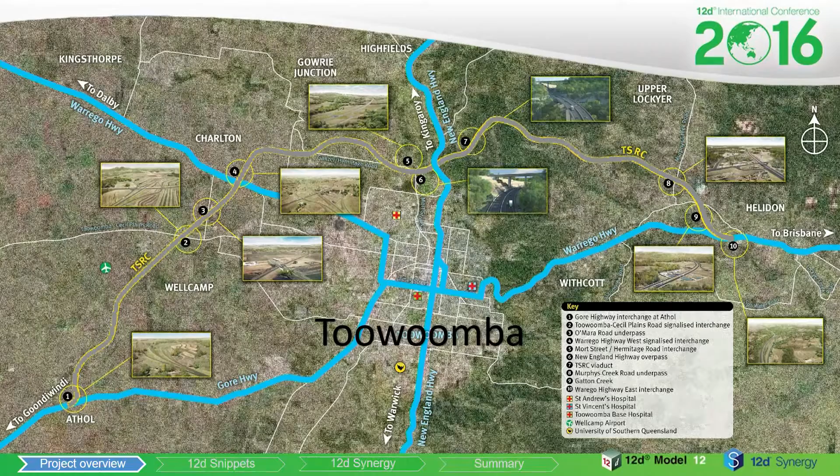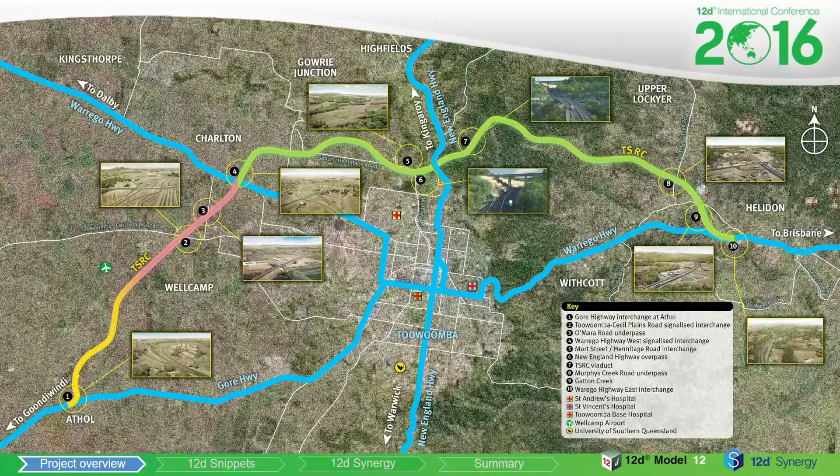So a little bit about the project. The bypass road is situated to the north of Toowoomba. It's about 41 kilometres in length and starts at the Warrego Highway in the east, travels through to the Gore Highway in the west via Charlton. There's 4 lanes from the Warrego Highway east interchange through to the Warrego Highway west interchange, and then a further 2 lanes connecting through the Gore Highway.

So there's multiple grade separated interchanges along the road. There's the Warrego Highway east. This is the start of the project. There's a system interchange that allows traffic to continue onto Toowoomba or connect to the 41 kilometre toll road. About halfway along the road, we come to our first interchange at Mort Street. It's a simple diamond interchange with dual roundabouts effectively, and allows connection to the New England Highway and to Toowoomba CBD.

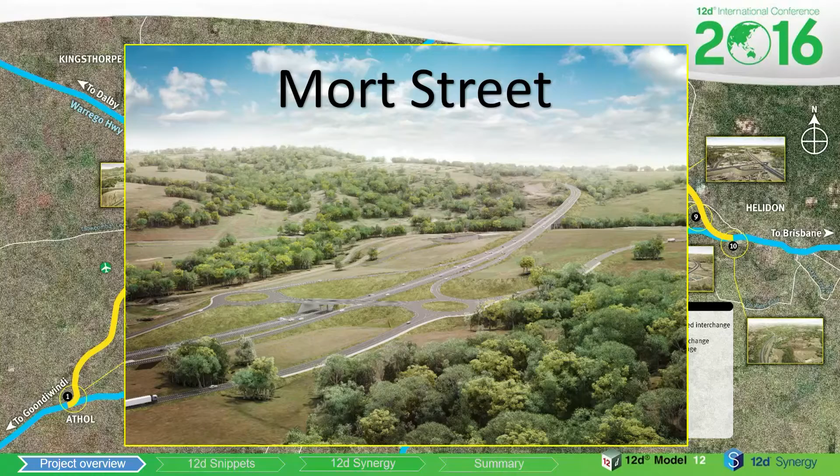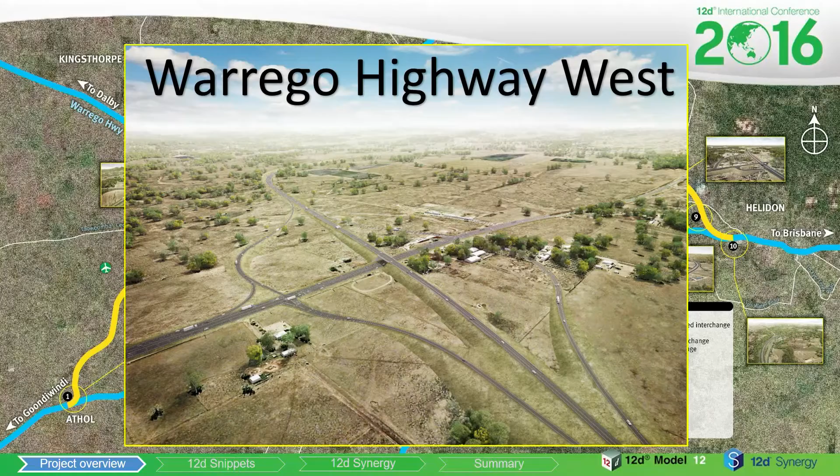We come along Warrego Highway West, again another diamond interchange, and this is at the end of the 4-lane section and provides the vital connection through the existing national land transport network. So a lot of freight will be going out through the existing Warrego Highway and bypassing the city. We have Toowoomba Cecil Plains Road. This is on the 2-lane section of the road. Again another diamond interchange, and provides connection to the Wellcamp Airport and Business Park.

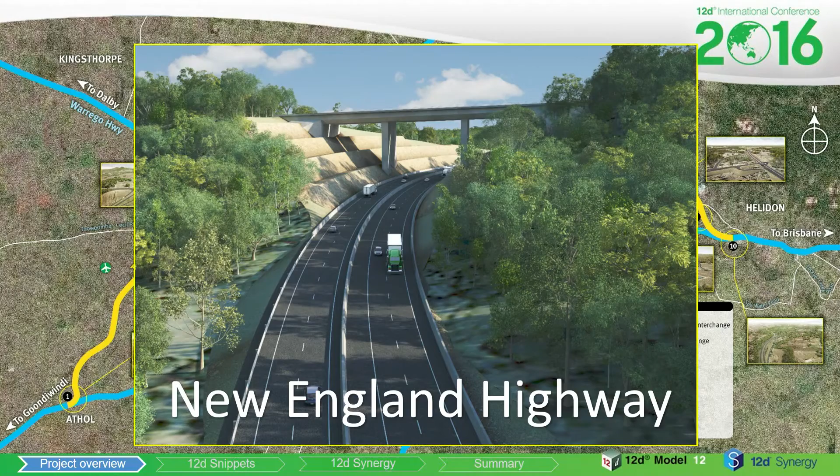Gore Highway is the end of the project and provides a simple interchange connection at Athol and completes the expansion to the National Land Transport Network. So on the project, there's approximately a 30-metre deep cutting through the top of the range. This will allow all heavy vehicles, including dangerous goods carriers and over-dimensioned vehicles, to use the Toowoomba Second Range Crossing without going through the CBD. The New England Highway will be relocated to a new structure that connects over this cutting. On the approach to this cutting, there's an 800-metre viaduct in fairly challenging conditions, so it's fairly impressive as you head up the range.

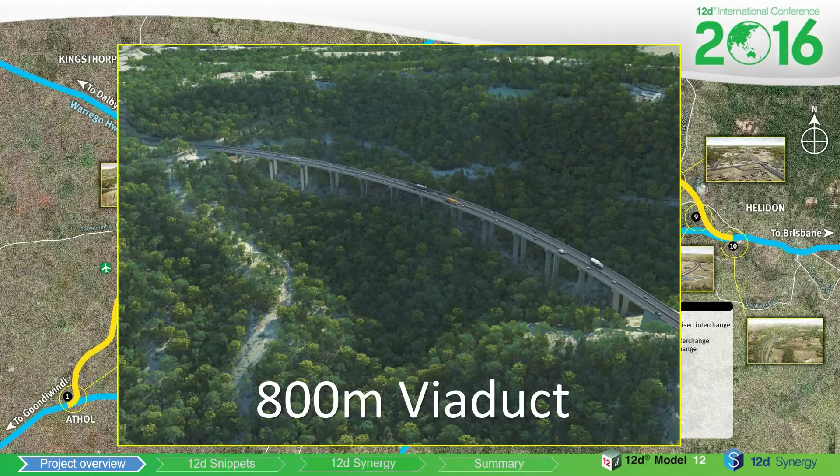12d version 11 was used to design the roads, earthworks, drainage, public utility plant and all other miscellaneous civil works across the project. To manage these disciplines, the project was effectively split into 4 key areas. So we had an east, a central, a west and local roads. So that was all our returned works to the local councils and the TMR.

During the tender, 12d version 10 and decisional templates were used to design the road. However, with the release of version 11, the old decisional templates were retired for snippets. So the snippets allowed us to insert decisional-like strings to create the benching, but with the full flexibility of being able to change the grade, width, slope individually. Being a very large earthworks project, this was extremely important to allow individual modification without the need to develop a new decisional template each time.

So for the designers, it's a two-step process to insert the benching on the project. First of all, we insert the first snippet, and this prompts the user for a variety of parameters, if you like, to define the geometry. So here we have whether it has a table drain or not, and all the cut and fill slope widths, slopes, etc.

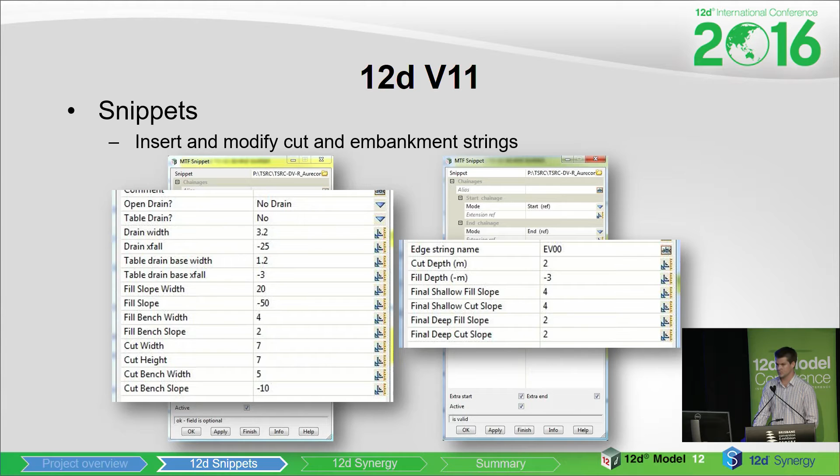Now this can be applied for the whole alignment, or it can actually just be applied for a particular cutting. From here, the user will then modify that benching because it's actually an overbuild. It builds past the existing terrain. And the second part of the snippet is the actual trim. So we then trim the benching back to the natural terrain using a couple of minor parameters of cut depth, fill depth, and when to invoke shallow and deep decisionals effectively. So there are still decisionals in them, they're just a little bit smarter with snippets.

This typical section's by far not the largest on the project, but shows how extreme some of the earthworks are. And this goes for both cuts and embankments on the project. We had challenging conditions on both sides of the Great Dividing Range. We had the very steep terrain on the eastern side, and then it's very flat with some not so great black soil to work with on the western side. So having the ability to modify each individual bench as required for better stability, when we hit not so great soil, we're able to lay them back and then steepen them back up without a problem.

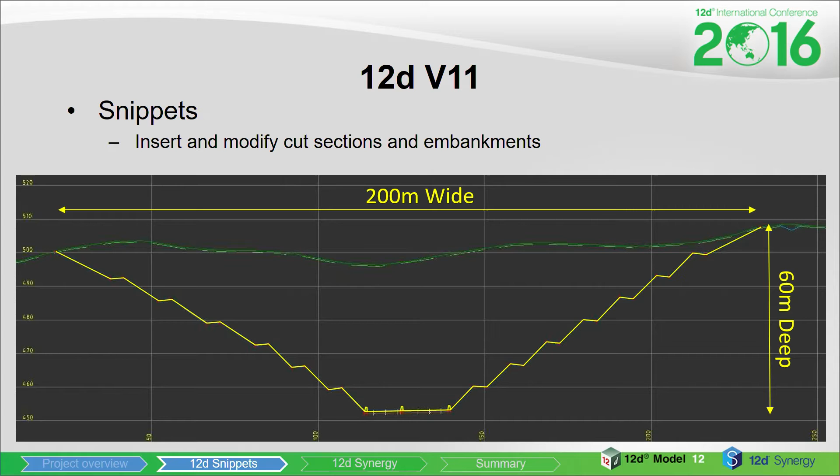We had a few other snippets on the project. So we had a concrete barrier snippet. This effectively prompted the user for the barrier type, whether it had lighting or didn't have lighting. Now this varied just the top width of the barrier. It had a variety of string selections, backstop, behind the barrier, and any verge transitions that were required.

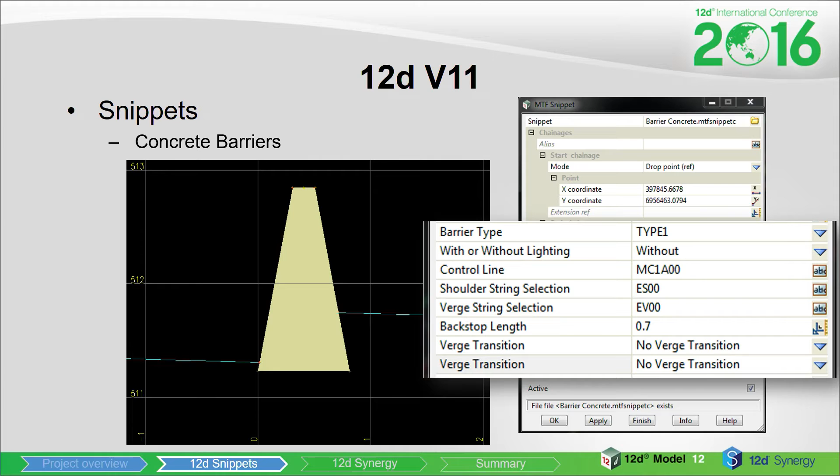So the concrete barrier shown here is not that snippet. This one's a little bit more complicated because it actually takes into account the varying slope of the carriageway, or the difference in slope, and varies the slope of the concrete barrier. Now, it again is a two-step process, but a little bit more complicated than the standard insert.

We had guardrails for pretty much the entire length of the project, and to get these to be inserted readily was a must. So we again built a small snippet that gave the option for the user to define whether it was thrie-beam or W-beam. It gave the option to define the terminal type, so type 1, type 2, whether we had connection to a concrete barrier. There's a variety of drop-down lists to choose from. Again, it prompted for the control line, string selection, a few parameters, and then the snippet instance.

So this is a pretty important feature of the instance. It allows us to actually overlap the guardrail as shown here in the picture, because without that, it wants to do all sorts of crazy things. Both the concrete barrier and the guardrail snippet were actually inserted on different layers, and that just allows us a bit more flexibility with the formation of the road without having to worry about the guardrail snippet, and allows us then to manipulate the road and let the snippet do a little bit more manipulation where required, so modify the verge behind it if required.

So you can see there's a verge width of 1.2. If the verge was only a metre, it would actually push it out to 1.2 for us where we inserted it.

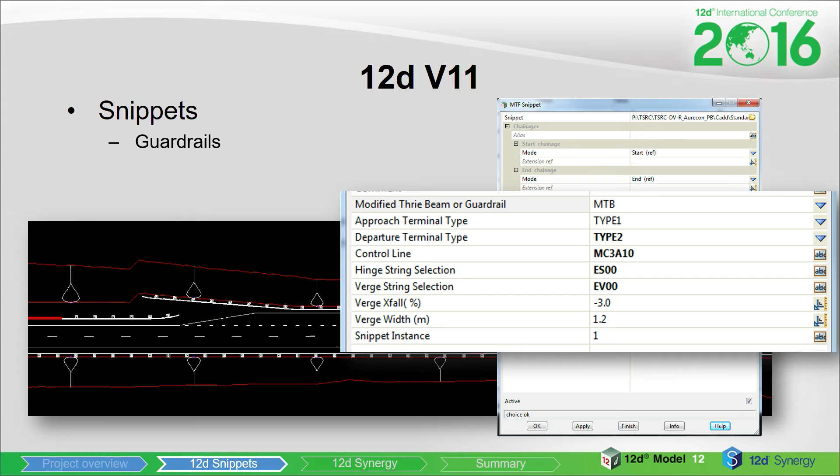Another snippet we had on the project was the emergency stopping bay you can see here. Again, there's a number of string selections, and we had the string selections in all our snippets, effectively because as we went down the different control lines, we did actually have unique string names based on the actual control line numbering. So if it was on a 0-0 control line, it obviously started at 0-0, 01, 02. And if it was off the 10 alignment, it would go 10, 11, 12. So we had a unique naming system that allowed us to actually identify strings depending on where they were.

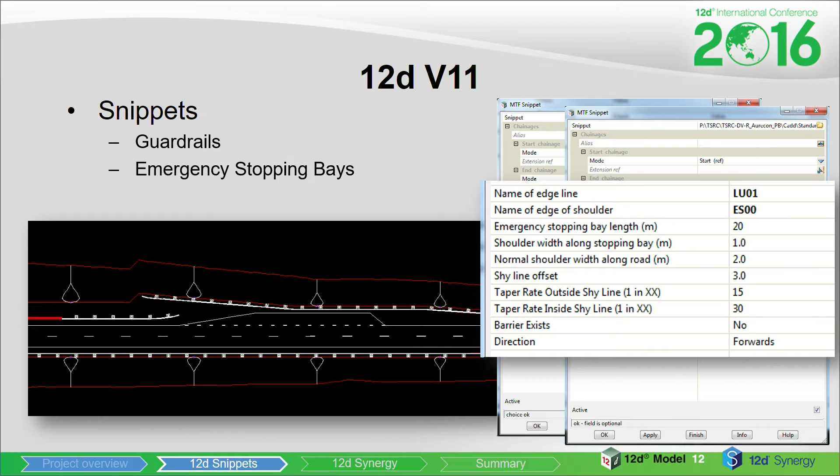This snippet again prompts you for the length of the bay. Again, string selection, string shoulder widths. It also had an important value inserted for the shyline offset. This is particularly important where we have guardrail and concrete barriers. It allows us to actually taper the rate inside and outside the shyline differently. So if it was inside, we'd go 1 in 30. If we were outside, we'd steepen up to 1 in 15. It just shortened the barrier. Again, all these snippets are available to be applied forwards and backwards on the control line.

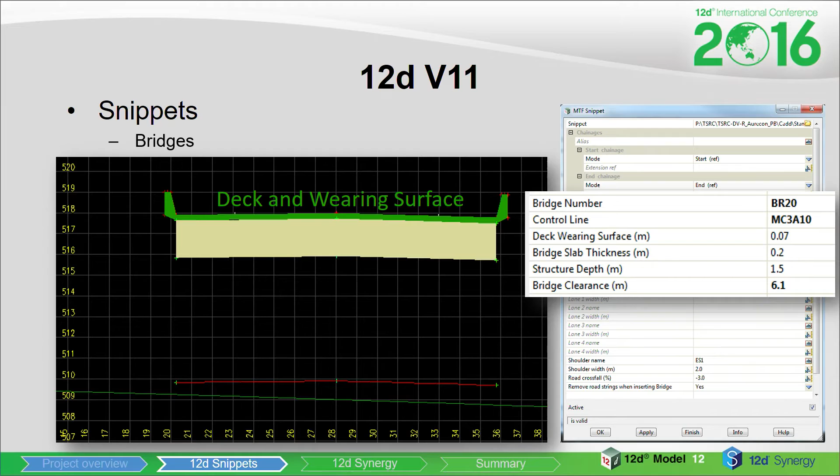We had a snippet that inserted our structures across the project. It's nothing fancy, it's quite a simple snippet. It prompts the user for a bridge number and control line. It gave us the ability to have a varying deck wearing surface and slab thickness, even though most of those were fairly constant, but also gave us a structure depth.

Now this allowed us to actually have soffit strings, and from the soffit strings we were able to put a bridge clearance and actually check our roads to this bridge clearance. So pretty easy to set up, very, very important for the road designers, and quick to see where you have your clearance.

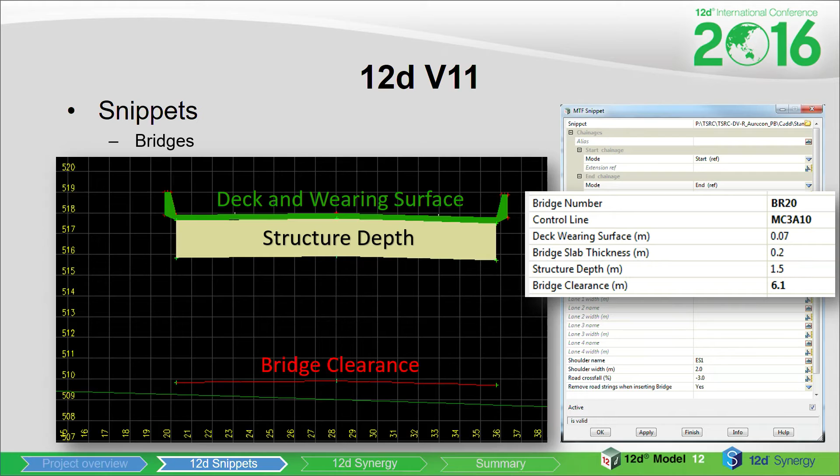So a few other snippets. We had an entry ramp snippet. Now, again, similar to what Steve talked about yesterday, it passes a few parameters through. So this particular one passes your design speed and your travel time. Now that's great if you wanted to calculate the exact length to 4.5 seconds of travel time if you want a particular length, but we also have the ability to manually override that lane length, which became important down the track as we wanted to extend our lanes. Again, applied forwards and backwards and a variety of string selection to allow us to actually insert it.

The exit ramp snippet is exactly the same as the entry ramp snippet in that it actually calculates the length required based on the speed and the lane width. This gave us the ability to actually modify it as needed, but again, we found sometimes if there was a sight distance requirement, it was very hard to muck around with the design speed when you wanted to lengthen it, so we overrode a manual auxiliary lane length where required.

So both snippets utilise the start and or end of the control line. So as the interchange moved or lengthened, the entry ramps actually got longer or shorter as required as well. And both snippets gave us the ability to add additional line marking or shoulder run out where required.

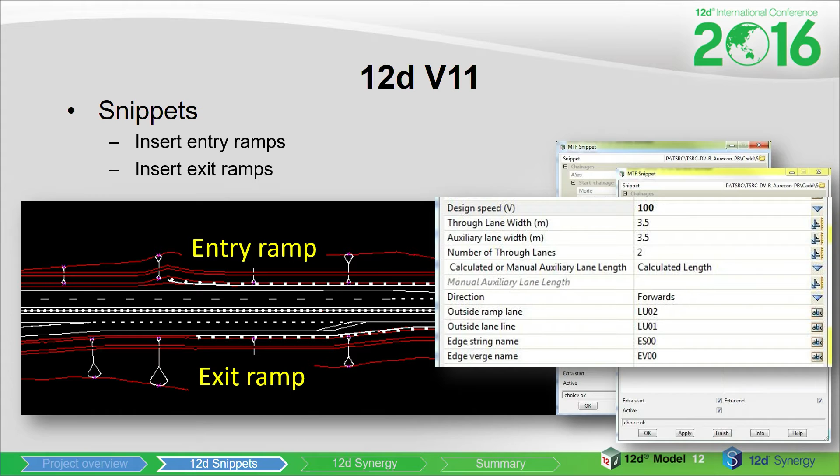We had a variety of other snippets across the project, probably over 20 overall, and they varied from minor modifications through to different merge or sight distance requirements. So they basically gave us the ability to achieve a consistent modelling technique across; we had at the peak probably about 10 different road designers through a few offices. And it basically saved us time on having copious amounts of modifiers. If you were to expand those open and look what's in the back end, they're doing a lot of work for you.

So when the tender was awarded, APB came together to brainstorm different IT architectures that would be able to handle and deliver the large-scale multidiscipline project. For the first time on a project, 12D Synergy was considered as a software platform that could help manage 12D model data. At the time, neither Aurecon nor WSP Parsons Brinckerhoff had implemented 12D Synergy, but within 2 weeks of approval, we had the 12D Synergy server set up and were using it on the project. This was a huge benefit in the early days as the project office wasn't quite set up, but it gave us the ability to start the design from our different home organisations.

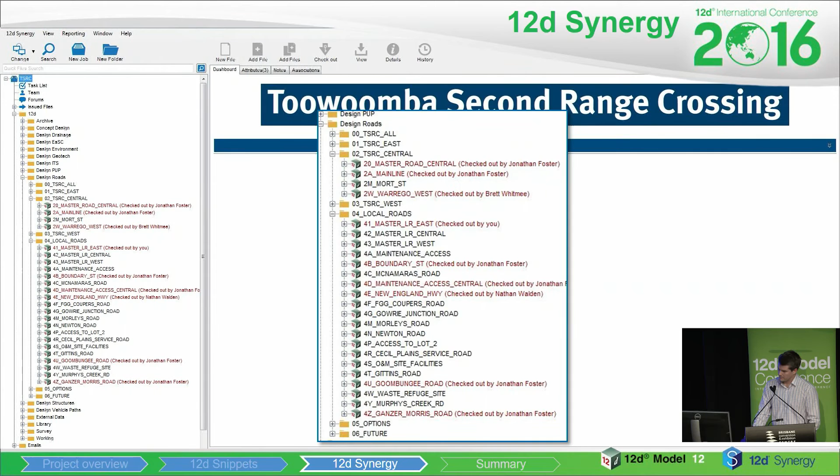The great benefit of having 12D Synergy was the ability to set up notifications. Now this is extremely important when you're working in multiple offices, as you're not often sure when the next guy is going to be out of a project or checks in or out of a project. So I have notifications set up on a few key folders to see if anyone checks out the survey without knowledge, and vice versa. Checking in master projects is also important.

One of the key things that took us a little while to learn with 12D Synergy was that in the early days, we'd do a design, we'd check it all back in, thinking we'd done a great job, and then we'd forgotten to actually share models or tins. And for us, in the early days, we'd check the project back out, we'd share them, and then check them back in. It was a while until we figured out that you could actually do this sharing from within Synergy without opening the project. So it's a hidden little gem, and it's a huge time saver, because it's often the case that you've checked in a project and forgot to share out a model or tin.

And by far the biggest benefit of 12D Synergy so far, I think, has been the history. So every time you check a 12D project in or out, it has the history. And we encourage all our users to have a detailed history log where possible. As you can see, Brendan's checked this project in over 165 times at this stage, and he does a very good job at actually putting the description in. This is a huge benefit to be able to pick up a project when they go away, or check what's been done last time.

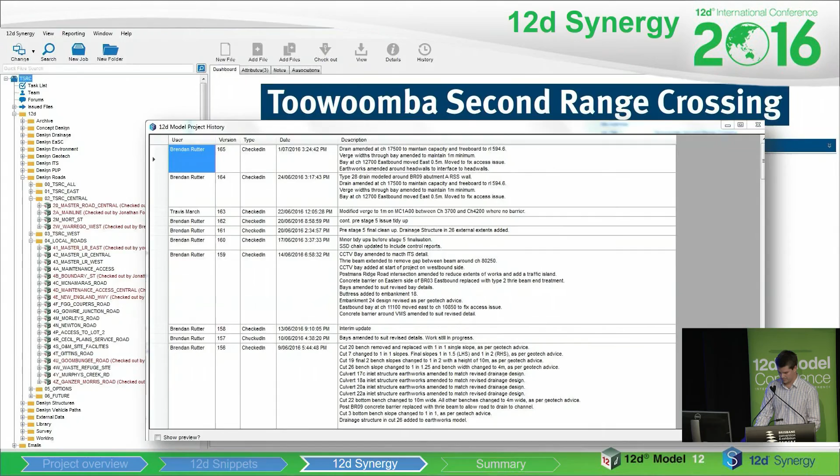So in addition to the 12D model data, 12D Synergy is also managing our emails across the project. One of the key benefits of this was the ability to integrate the system into the Aurecon and WSP Parsons Brinckerhoff Outlook Exchange service without the need of IT or changing our email addresses. The install simply integrates a 12D Synergy add-in into Outlook, and it gives the ability to file the emails and search for them.

So on the project, we've set up a couple of custom attributes within Synergy. When a user sends or receives an email, depending on their setup, they get prompted to file the email. And we have two mandatory fields. One's an area and the other one's a discipline. So the user gets to file the area, whether it's central, east, west, local roads, and then a discipline. They're all drop-down lists, so you just pick what the discipline is. We also added an optional field there, and that basically just allows the user to define a further field to narrow down the search effectively.

This attribute tag of area and discipline allows us to then easily filter and group our emails within the 12D Synergy client. It's fully searchable, so you can actually search down where you want, and currently we have over 14,000 emails stored within our Synergy, so it's been working well.

An added benefit of obviously storing our emails in there was the ability to set up different group policies. It might be a bit hard to see, but on the left there, we've actually got a commercial folder, and this is locked down to only the commercial executives, but it gives them the ability to file away sensitive and commercial information.

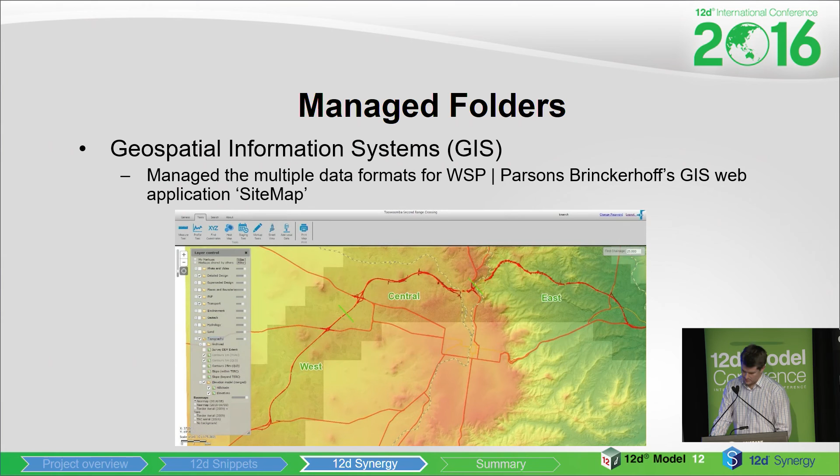So WSP Parsons Brinckerhoff's web application called Sitemap is used on the Toowoomba Second Range project to collate and publish existing and design data, allowing the greater project team to visualise the project in multiple layers of information. The application is custom built based on the ArcGIS platform and has multiple folder and file formats. So as you can see here, it's crazy the amount of different file formats and databases that they have.

On previous projects, our GIS team have never been able to work in a document management system. They've just got too many files, and it's too hard to track down what has changed. So they've had to always store the information on a network, and that most likely is in our home organisation. So they've been detached from the project office, if you like. 12D Synergy's managed folders has allowed them to sit in the project office, so it's a huge benefit to be able to wander up to the GIS team and get them to make any adjustments to the sitemap.

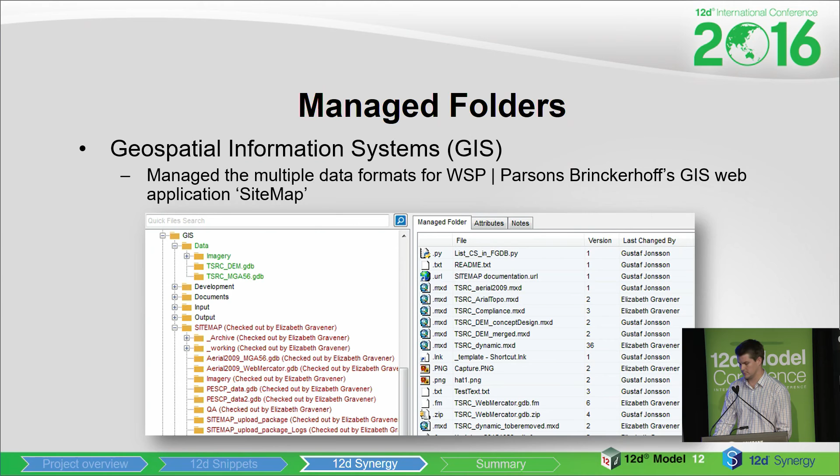We also store our Navisworks and Civil 3D folders in our Synergy server. Now, Autodesk Navisworks was used to visualise the different design elements with all the disciplines. So we've got our earthworks, drainage, our roading. It just gives the engineers an ability to actually visualise the project outside of a 12D model. We use Civil 3D on the project to interface with our borehole database and produce geotechnical outputs. These software platforms rely on a variety of different formats, which managed folders are able to handle.

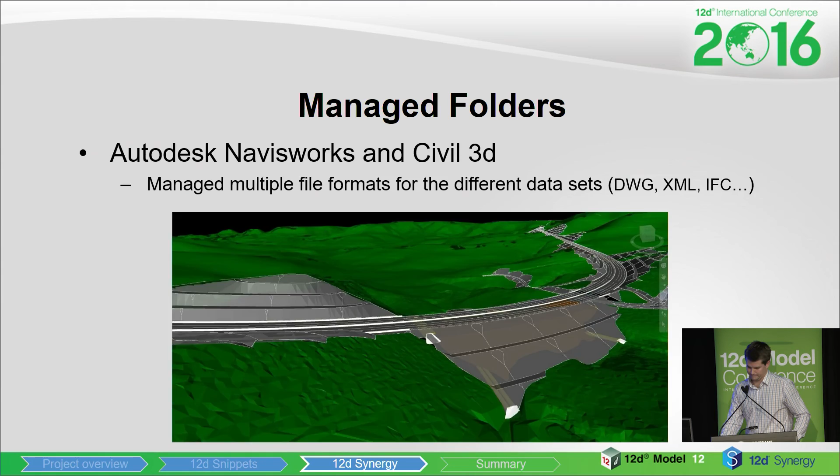XPSWMM I don't know a lot about, but I understand that on the project it models the hydraulic requirements of the culverts by simulating various rainfall events and accurately determining catchment runoff, accounts for storage within the catchment, and models cross-drainage flows. The SWMM model files are a combination of multiple files, folders, and database formats, which again 12D Synergy was able to handle with managed folders.

So again, a software platform that we would have stored on the network previously has really given us the ability to have resources across multiple offices. Now, when it was all on the network, that was impossible to do. You would have had to have zipped up everything and sent it to them.

So 12D Synergy has helped this project manage all the 12D model data in a secure and centrally located data source that's accessible by both Aurecon and WSP staff. This has allowed resource sharing to occur seamlessly without troublesome copied datasets or slow network connections. 12D Synergy has safely managed the data integrity across all software platforms stored in this database, with the added ability to retrieve previous versions if required.

It's also allowed us to have a fairly structured workflow, so clean and simple sharing between our different platforms and different disciplines with the use of static and live design projects. Other benefits of 12D Synergy have seen the reduction of our continuous network traffic and improved desktop operations by working off our local drives. Sensitive and commercial data has been locked down from the wider project group as required.